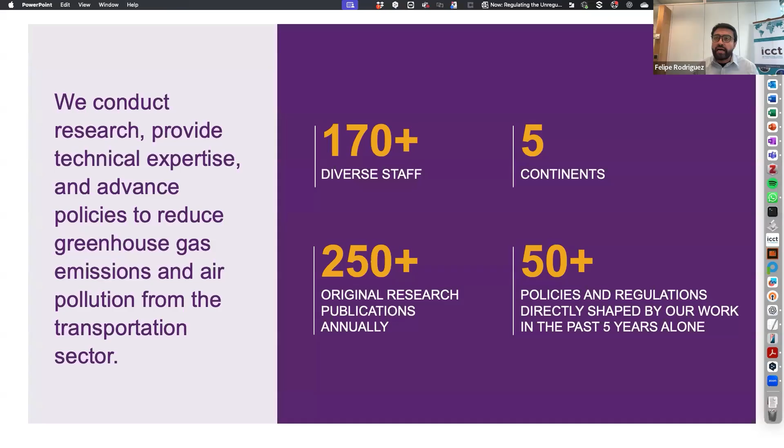So with that short introduction, just wanted to mention what we're doing today. We're going to have 2 presentations to set the scene. My colleague Shiyue Mao from the ICCT will present on the pollutant emissions perspective from fuel-fired heaters. We're going to hear from Katrina Sutton at CalSTART on the efficiency perspective of fuel-fired heaters in electric buses. Then we're going to follow that with a panel discussion with experts whom I'm going to introduce right before the panel, but you can already see the names here.

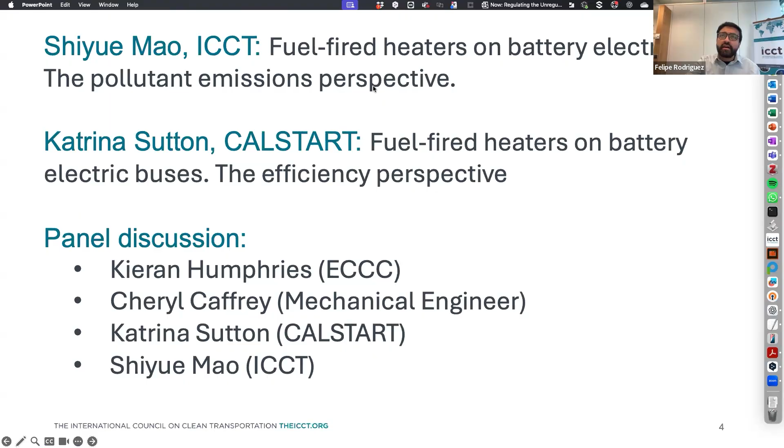All right, so over to Shiyue. He is a researcher at the ICCT, has been with us for a number of years now. He's an expert in diesel and electric heavy-duty vehicles in the Chinese context and has been the project manager for this testing that we did on fuel-fired heaters in an electric coach in China. So over to you, Shiyue, for your presentation.

Good morning, good evening, good afternoon to everyone. My name is Shiyue Mao, a researcher from ICCT Beijing office. Today I'd like to take you through a very interesting topic, the fuel-fired heater, a heating device on battery electric buses. So first and foremost, what is a fuel-fired heater?

On the left-hand side, it is an inner structure for a typical fuel-fired heater on electric buses. It's a heating device on electric vehicles - you can imagine it as a mini boiler, which burns fuel in the chamber and delivers heat to the cabin in winter. It has a very simple structure and straightforward control logic when using it.

Once turned on, the heater is working until it reaches the preset temperature, and then it turns off. It's usually installed below the passenger compartment, especially for electric buses and coaches, at the back of the vehicle.

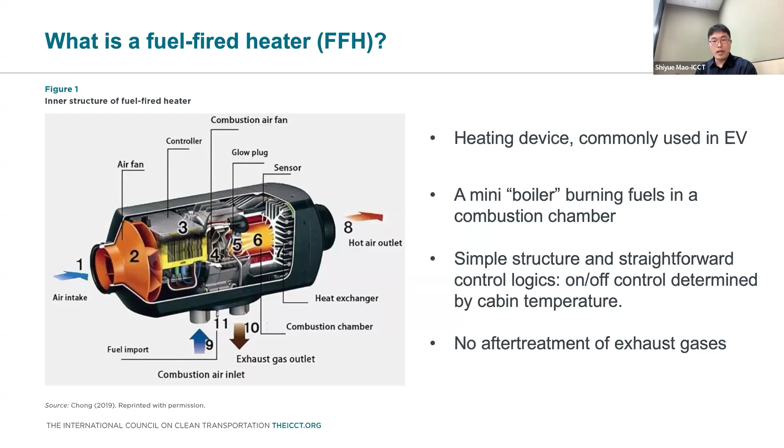Which I will show later. Due to its small size, there's usually no emission control equipment available, and actually that's where the problem comes from.

However, most of these regulations were enacted about a decade ago and turned out to be outdated. Secondly, some important pollutants such as particulate matters, NMOG, and hydrocarbons are still missing from some regions' regulations. For example, in China, the regulation only covers NOx, carbon monoxide, and hydrocarbons. For California, hydrocarbons and PM are missing, while for EU, PM was regulated by smoke number, which is not a very accurate method.

So it should be noted that these standards are incomparable across regions due to different metrics. You may already find that in China and the EU, they regulate in ppm, parts per million, while for California it is in grams per mile. You may also be curious why China has a much more stringent limit than EU in this table.

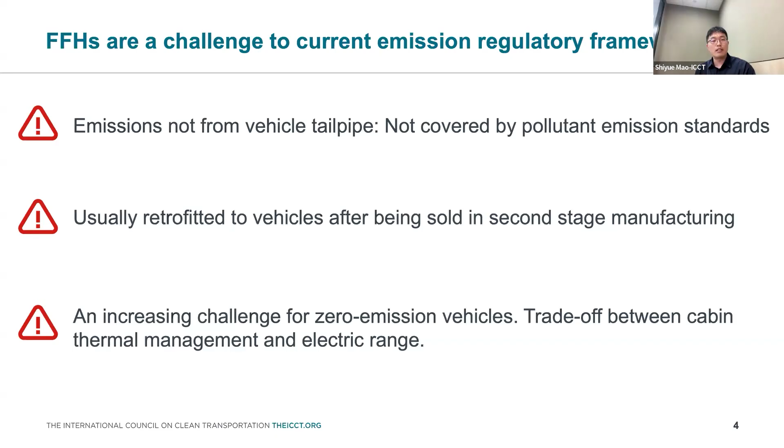I also showed the position where the fuel-fired heater is usually placed. As I mentioned, it's always placed at the back of the coach.

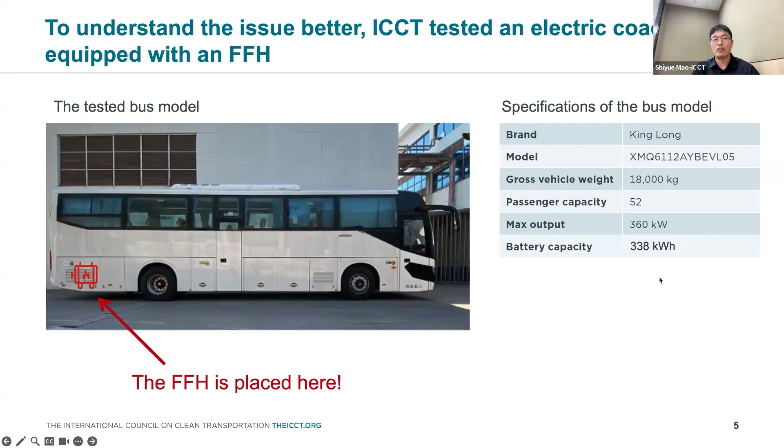This slide shows the setup information about the fuel-fired heater. This heater is installed on the bus by the manufacturer, so it's not retrofitted. This heater can output up to 35 kilowatts with diesel consumption about 3.6 kilograms per hour or 4.24 liters per hour. So from the perspective of fuel consumption and power output, we can say it's a very powerful heater on the coach.

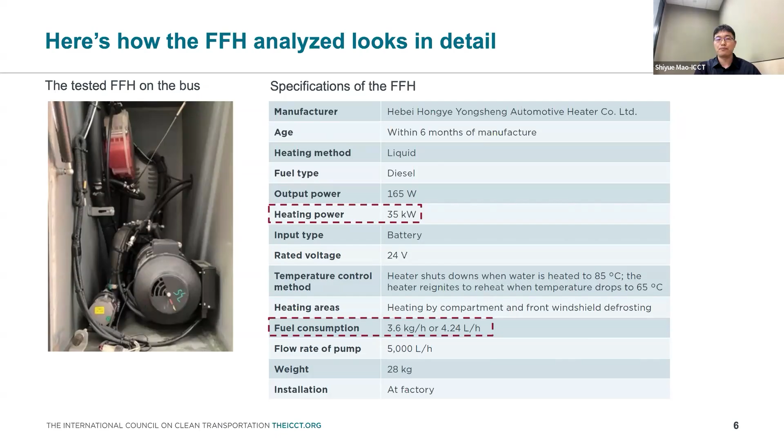So in this study, we also scheduled tests at different temperatures, namely 20, -7, and -20 degrees. In the tests conducted by heater manufacturers, a heater is usually tested at 20 degrees, room temperature, so we also followed that procedure.

Firstly, in this case, we tested with the vehicle running on the chassis dynamometer and in idle conditions as well. We ran these tests at 20 degrees to collect some benchmark data. In addition, we also wanted to quickly check if the heater is truly working independently from the bus, and it seems true — the working conditions of the bus and the fuel-fired heater are fully decoupled.

After that, we tested in idle conditions at -7 and -20 degrees. We turned all heating functions on with maximum airflow.

We tested a couple of pollutants, including NOx, carbon monoxide, hydrocarbons, and solid particulate numbers, or SPN for short. We particularly tested two types of SPN, the SPN10 and SPN23, meaning the number of particulates with a diameter greater than 10 or 23 nanometers. We also tested greenhouse gases like CO2, methane, and N2O.

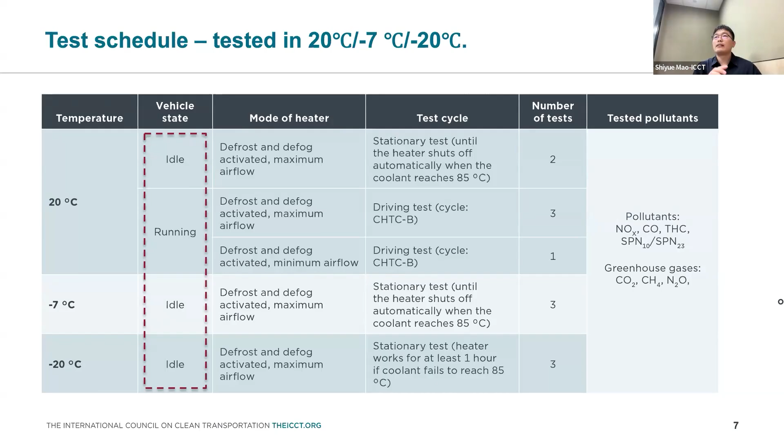So the final results seem impressive. In short, we found that in this particular case, emissions from the heater exceed limits of regional regulations. For example, the NOx emissions at -7 and -20 degrees are about 18 times higher than the limit of California's LEV second ULEV standard. Also, for NMOG, the non-methane organic gases, the emission is also more than double the standard at room temperature.

So here's something that needs to be noted: we found it very difficult to test or to examine the actual concentration of NMOG at -7 and -20 degrees due to condensation in the tube. So we finally didn't show this number here.

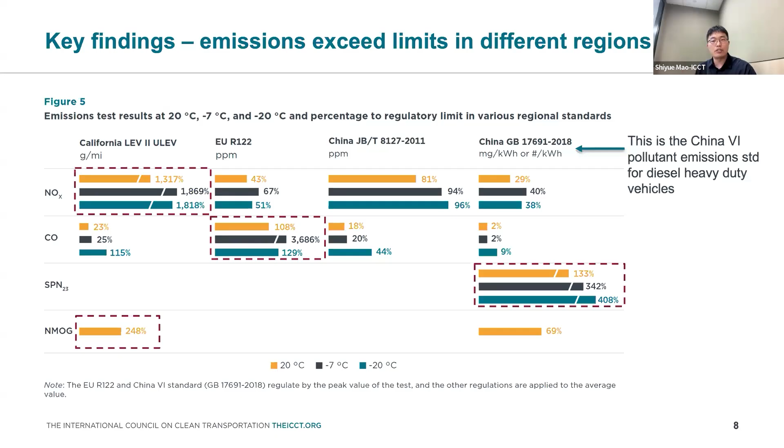And similarly, the emission from this heater also exceeds EU's limit in carbon monoxide and China's vehicle pollutant emission standard in SPN 23. Here, I would like to clarify this China GB standard. It's different from the other one, the JB/T, which is specifically for fuel-fired heaters. The China GB standard, or more commonly known as China 6, is for diesel heavy-duty vehicles. So we put the standard here just to illustrate that the heater is multiple times more polluting than the diesel engine with similar power configuration on diesel trucks in terms of particulate matter, if we didn't try to control it with after-treatment technologies like DPF.

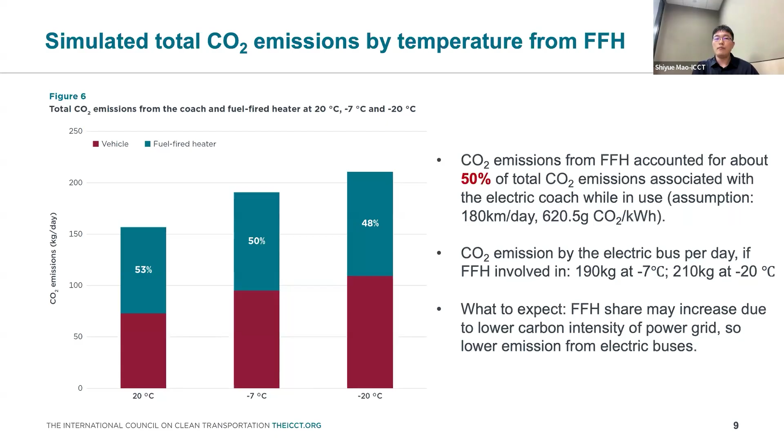So to wrap up, here are some quick takeaways. First, the current regulatory framework is inadequate to regulate the fuel-fired heaters. More pollutants and greenhouse gases could be taken into account. Second, this study found the fuel-fired heaters are heavily polluting, especially for particulate matter and NMOG. The heater is more polluting than a diesel engine with similar power output if no after-treatment equipment is installed. And lastly, the heater emits almost the same CO2 as the electric coach itself. And the situation may be even worse due to a cleaner power grid in the future.

And based on the tests and analysis, we also propose 3 recommendations. First, we need to expand regulations to include more pollutants, as currently no regulatory framework around the world is sufficient. Second, it is necessary to integrate this device into the vehicle type approval procedure. The emissions from fuel-fired heaters are non-negligible. We shouldn't keep them out of the certification procedures. And lastly, we are looking for more tests and data. We were very surprised to learn that there are very scarce studies in this field so far. More tests can help update emissions inventories and design science-based policies.

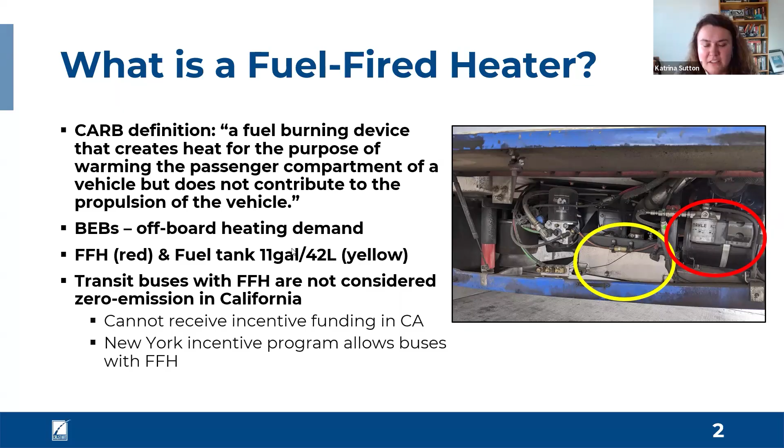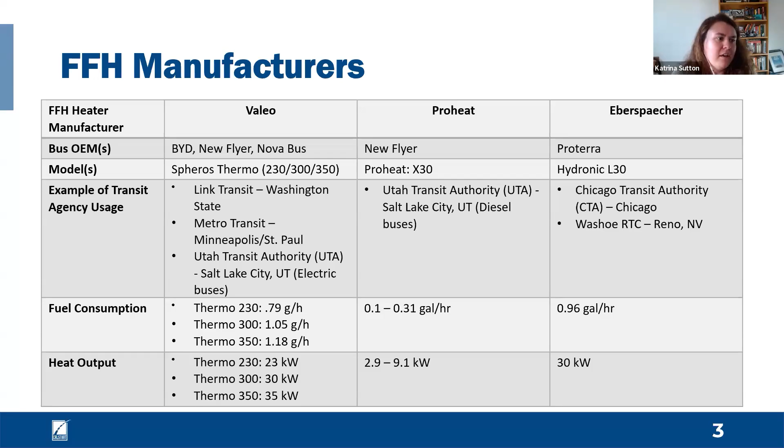This is just a super fast overview of the different heater manufacturers and their fuel consumption and power output. We find that on average it's about a 30 kilowatt power output. I know Shiyue said that the heater they were testing was 35, so that's roughly about what we see here. So it's just a number to keep in your head. And then the fuel consumption is obviously dependent on the set point, but we expect it to be about a gallon an hour of usage. So just more numbers to keep in mind.

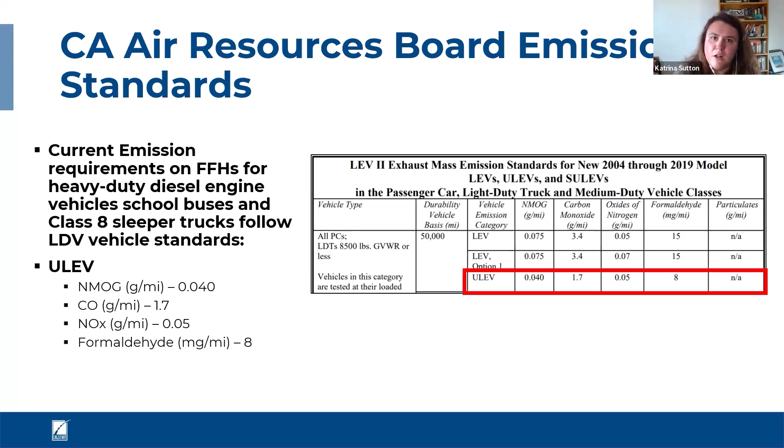But the other thing that I found interesting from the California perspective is that the heater testing is only required if the heater is going into a diesel engine vehicle. So I focus a lot on transit. So if the heater is put into an electric transit bus, technically there wouldn't be any need to do compliance testing in this way. I just think it's kind of an interesting subset. It seems unlikely to me that somebody would do that because the market is sort of small, but just something interesting to note.

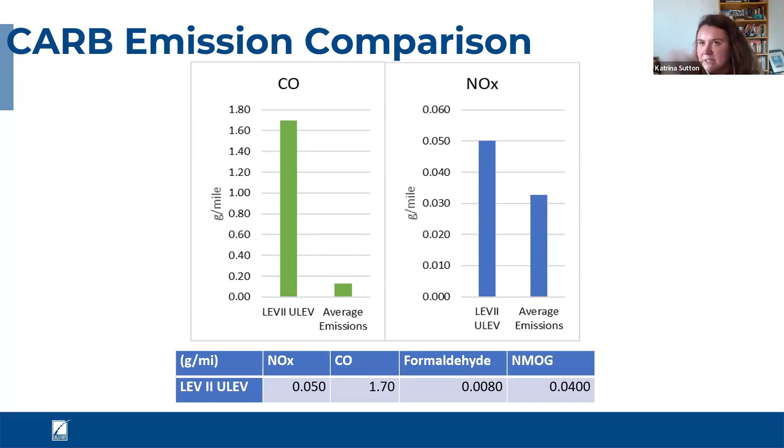So this is a little bit of data. I won't go into the weeds here. This is data we received. I did not go out and test it on a bus, but this is showing that these particular heaters are well below the California standard. So they aren't having problems here. Obviously, the case may vary based on different manufacturers and also different, I don't want to say duty cycles because it's a heater, but think about duty cycles here.

So we find that the heater can either be used as a primary or a secondary heating source. So depending on when it's cold, sometimes the bus will start with the electric resistance heater and then pop in the fuel-fired heater as needed, or it will actually swap. We find that swap point to be about, I think it's 40 degrees Fahrenheit, which is pretty cold. 40 degrees Celsius is not cold, so I'm trying really hard. Keep that in mind. I'm reading my notes here, I apologize.

So this first number, we looked at some data in the Midwest, which is pretty cold, on a 60-foot articulated bus, which is the one with the accordion in the middle. So he's very talented when he moves around. And we found that it uses about 30 gallons of diesel per bus per month for heating. And so there's no extra energy being pulled off the traction battery, so that energy can be used for actually operating the bus.

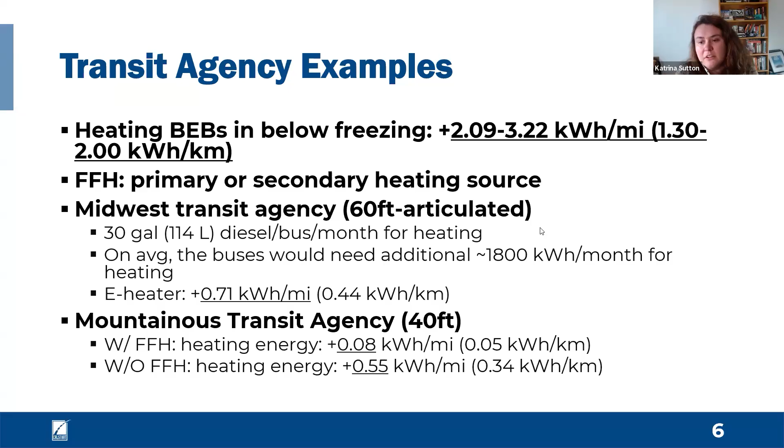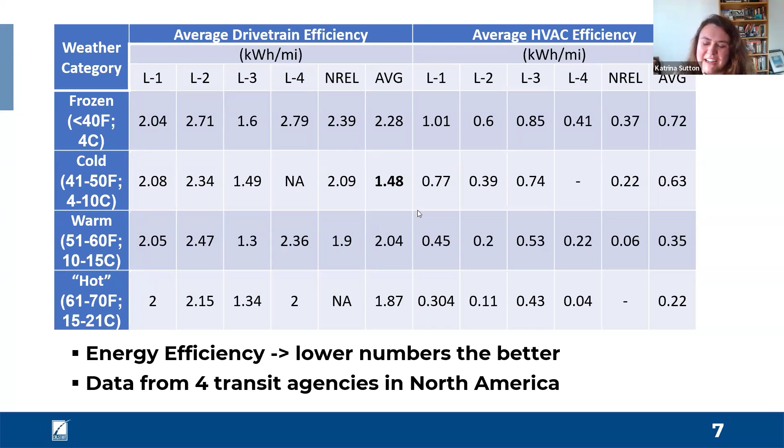Right now, I am actively running a study in the States looking at an interesting bioethanol catalytic heater as a comparison to the existing auxiliary heaters that are obviously run by diesel. So right now we're running an electric resistance heater, a bioethanol heater, and a fossil fuel heater in the same transit agency.

So it's the same climate, roughly the same drivers, the same routes. And so we should get some really interesting data to do as good as you can sort of comparison when the buses are actually running. I really like doing demonstration work like this, so I'm really looking forward to this data.

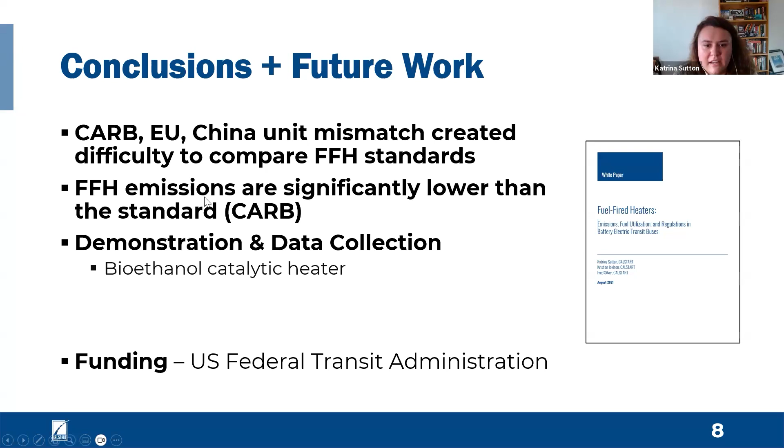Great. Thank you, Katrina. I think that was very interesting. And now we can move to the panel portion of our webinar. So we have the pleasure of having today, in addition to Katrina and Shiyue, whom I already introduced, Kieran Humphries from Environment and Climate Change Canada. Kieran is a project manager and mechanical engineer at ECCC, specializing in advanced vehicle technologies and emissions research. Kieran has over a decade of experience in vehicle electrification, diesel after-treatment systems, and currently works with the Air Quality Research Division of ECCC and has a master's degree in mechanical engineering from McGill University.

And we also have Cheryl Caffrey. Cheryl is a very seasoned mechanical engineer with over 30 years of experience in emissions research and regulatory development. Until recently, Cheryl was at the US EPA. There she led a lot of projects and supported many emission rulemakings through, of course, the testing and the analytical side. If I understand well, you're also a very prolific author in SAE, for example. I ran into a lot of your papers when I was doing a little bit of research around your background, Cheryl. So we're very happy to have you join us today.